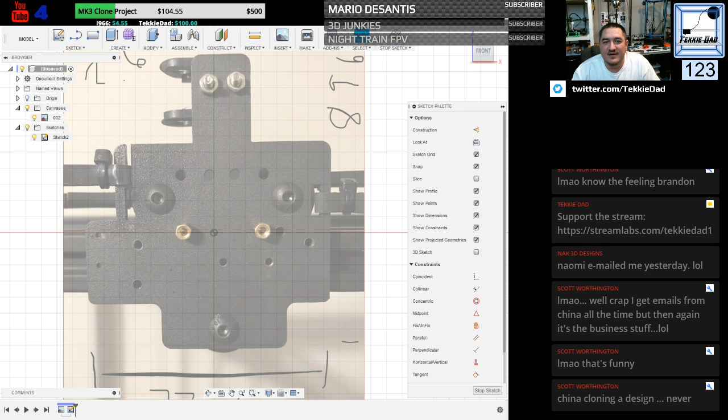Alright, so let's save this as the 2E. 2E Cyclops, that way it'll be already good. Alright.

Nice, yeah, keep it US bound. No, I'm just kidding, but hey, that's a company decision. Then you know, you're the author, you're the designer, I stand by you. It'd be kind of nice to have, and not in a mean way, but it would be nice to have some more US made products like this that can offer support, or parts that you can actually replace by going to a local hardware store instead of having to order everything from overseas because there's no real place to get millimeter anything around here. Yeah, true.

Yeah, and Naomi would definitely be able to help keep them on track with it since, yeah, it didn't work too well back in the day. But let's see, I need to edit the canvas.

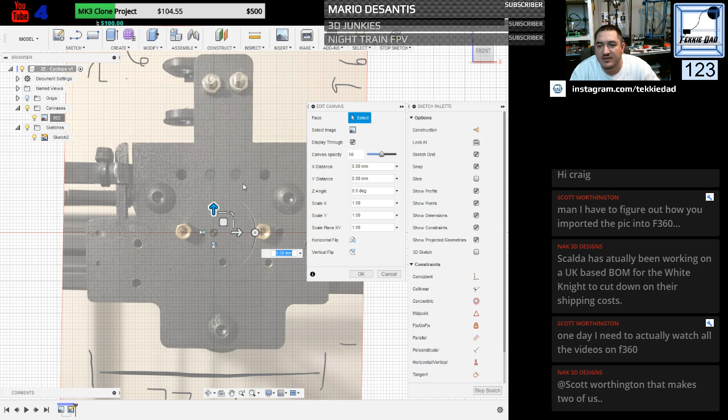But I had the degree off, so it rotated just a little bit. Still good now. And then once you do that, right click again, say calibrate, and as you see, I already took a measurement with my calipers, so I just marked it from the very edge over here and took the very edge. It's hard to see, but they're on the 2020 rail, the 2020 slot, right at that junction 90-degree angle corner. I picked that, same on the other side, and then I gave it the 77.2.

That way it would scale it the right way that I need it, so now I can draw directly over top, and I can draw the mount based off of what I see and what I need. Because I went with the Petsfang Cyclops, but unfortunately, and I didn't know this ahead of time, this edge does not line up over here.

I mean, you can hook it, but then the center is more over the brass nut on this side, so it's not centered over the wheel. And then none of these other holes line up with that mount either, like the mounting hole over here, none of that lines up.

These don't line up, and it's a mess. But it does have a really big cavity between the metal heat sink and the very back wall. It's got a nice deep hole for the heat sink, with a vent hole on the side so it's not directing airflow down, and the bottom is fairly sealed up. There's very, very little gap to make sure airflow isn't going down into the print, which is also really nice.

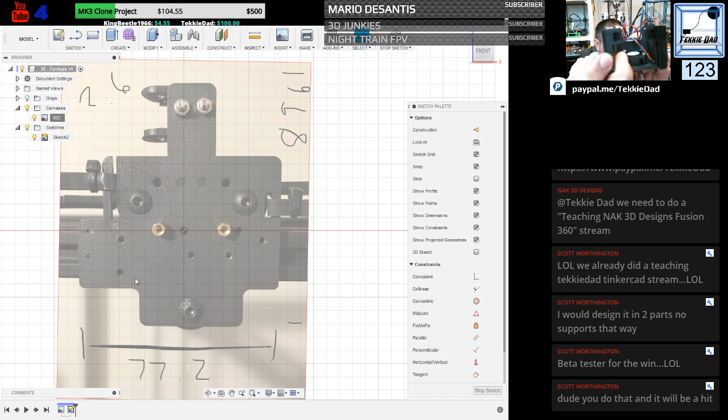But I am still developing the secondary fan add-on that I was making before with the tri nozzle - I was almost going quad - so you still have that as an option for this factory mount. So even if you don't have this mixing nozzle, or if you do, there'll still be a different fan replacement to go from just... sorry, I have one of the fans off... to go from the single that has just the 2-port on either side to having essentially a big bracket like that.

I just got to make room for the new hot end, and I've got it here on my desk. So there's... ooh, there we go. So there's the new mixing portion, nice big block. So when you attach it, I mean, single side mount heater cartridge goes all the way through, and very nice split. So yeah, I'm hoping this thing will be

Very nice. Right you are, Bryan Vines. This is the X carriage on the X5ST-2E, or E2, depending on which way you look at it. Their website still says 2E, but I think it's supposed to be E2. But I don't know, it's all confusing. Anyway.

So I need to take this part out. Where's my screwdriver? There's my calipers. Where did I put my screwdriver? It's the thing, I'm always losing my tools. There it is, okay.

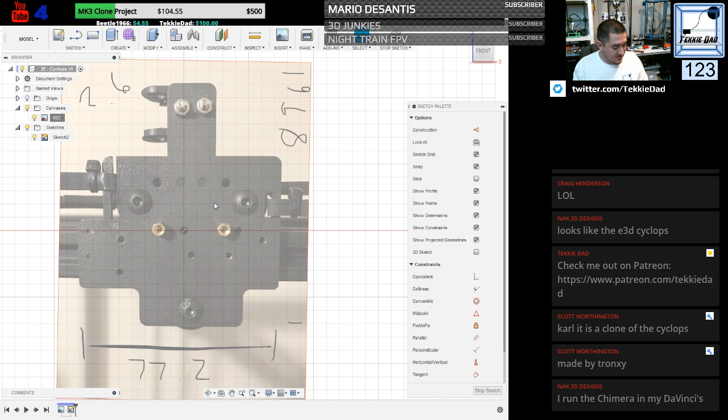So alright, so this is the actual heat break that they did. I mean, there's the pass-through to line up, but all said and done, when it's together, that's all it really is right here. This is the one that they shipped with my upgrade kit.

So as you can see, big issues straight out the gate. I got a nice silicone sock, but the height is going to be killer right there. Thankfully it's pass-through, so even though it'll sit low enough to print, it'll be buried inside of the factory housing, so I may not be able to do it so much.

Hold on just a second. Okay.

Alright, so let's get some measurements, because I need to make sure I design up a block here. Alright, 24.7, 24.9, okay. Center rectangle. So 24.9, 24.7. All right, so there's my extruder block.

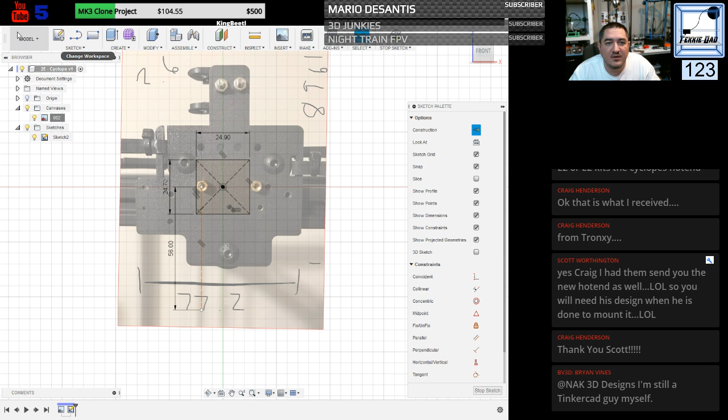I don't need a new design, but I do want to. Okay, so that's that cooler I was talking about. Go ahead and open that real quick.

This design was not able to be done on Tinkercad, or the original was. However, my secondary vent that goes through the back, all the way over through this open hole in the back - it's hard to see, but there's an air cavity going from one side to the other, and these double tubes come out through here so I can have a front blow. I can't do that in Tinkercad, but here it was pretty quick.

So this whole design can have a center blow, and I just need to get the blower piece itself. There's an inlet here, a double pipe, and then one that comes on the back side to go over here.

All of this, and the only reason I'm playing with it now is because Fusion - I've watched many tutorials, and since they're giving this huge program for free for us designers, since we make so little, I figured I might as well start doing it. That was my first major design. Everything else has been little trinkets and stuff.

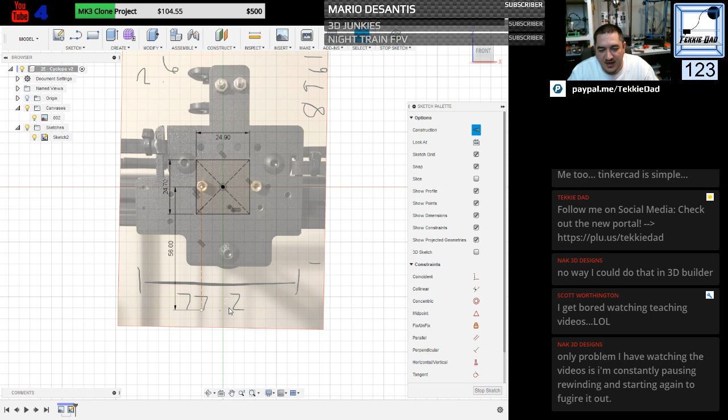So my heater block, the new one, is a grand total height of 54.2. So I need another line. 54.2.

So this, where is it? Ah, it's not what I wanted. But I need parallel to this point. No, yeah, it's not doing it. Fine, draw that out. Okay, why won't you move?

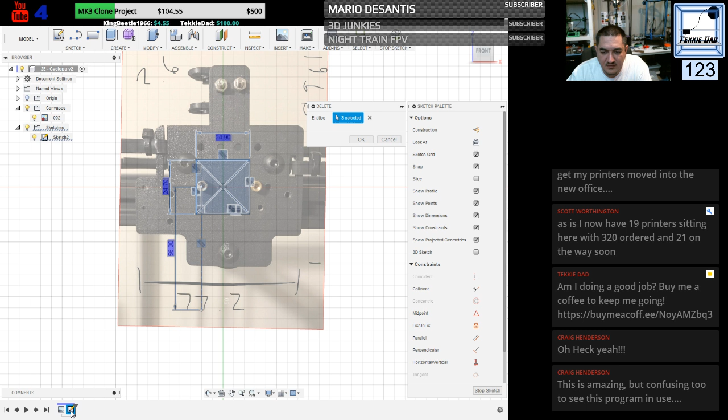So we'll do 60 there. Line, here, to the top. How big again? 54.2. There we go. Alright. I don't need a circle. Where is the 2-point rectangle? There we go.

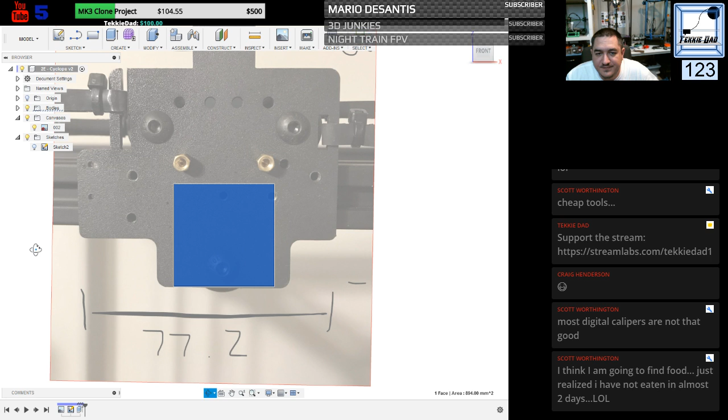So the thickness of the entire plate is 2.6. So distance back is 2.6.

Yeah, go find some food there, buddy.

Alright, so how far out is that? The head of that screw pointing out, 3 mil.

Fine, okay. Alright, so these... alright, so I need at least, let's see, it's a rectangle. Two-point rectangle. So yes, on the same. Right, so I want to go.

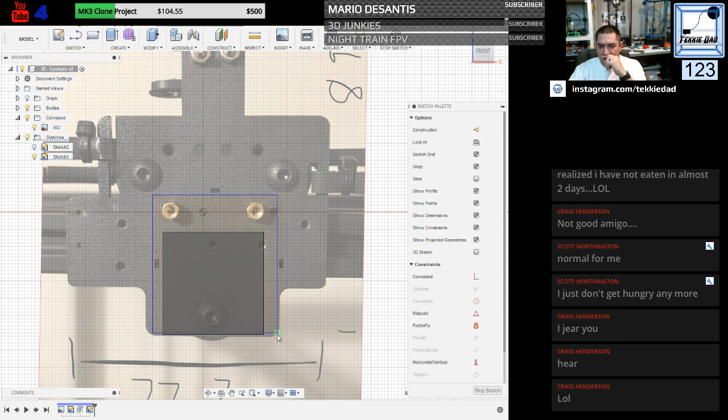There we go. Alright, so that'll be kind of the framework. It looks like that. Well, I don't know. Let's bring that in just a bit. Or no, let's bring it out. Yeah, let's go to the edges there. Come on, line up. There we go. Alright. Do a circle.

This is an extrude of... let's do, how big was the cavity here? Well, I guess I should measure from in here. I have a total of

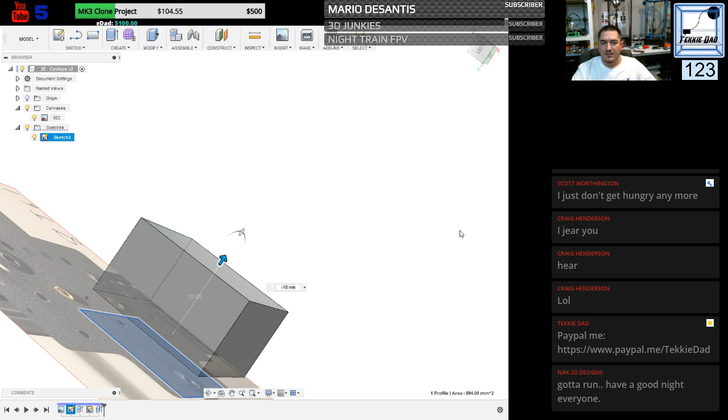We will do, yes. Start from the offset. Yeah, there we go. Well, except for, no, I want to be a cut. No.

There we go. Now it's a hollow. So yeah, just in case you weren't quite catching that, because I did it out of order, I moved it here on the timeline there at the bottom to make the big body extrude first and then go back to the little body for the cutout.

So that would be right. Okay. Alright, so that should cover that piece. We're going to need to go back to this sketch.

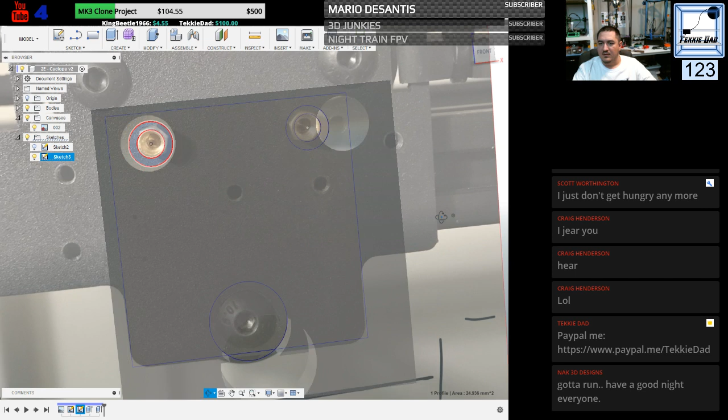I need to do our center circle, but only bring it out to 4.5. Sketch 1. So we will go. Trying to think here. All right, night, Carl. All right.

So it needs to be offset -5. It's going to go one direction, but I'm going to go maybe 5 millimeters. See how deep. I made that 12. We'll do 12.

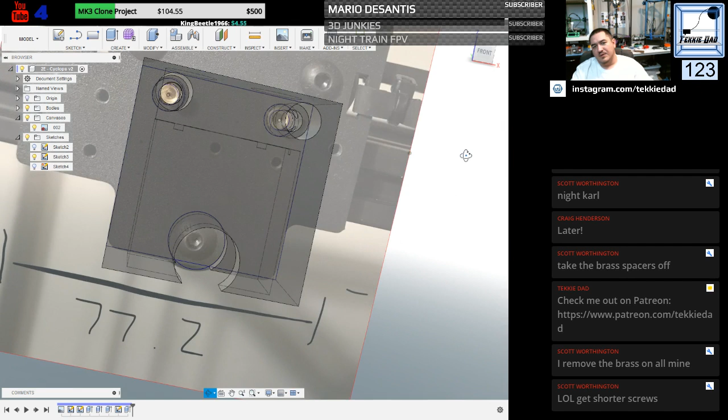So that's what I need to go. All right. Yeah, that's going to be interesting. I don't know how well that's going to work. Turn off the canvas for a minute.

Yeah, I don't see that working too well. Because even though you can put the screw all the way through, that back piece right here is where the screw head would be, and it's going to hit these PTFE cutouts. Like, the head of the screw is going to be too far in, and you won't be able to put that through.

The idea, I guess, here's where the heat sink itself would go. Though I don't know why it made that a hole there. Oh, because I didn't close it off there. Essentially, I guess what I was kind of thinking.

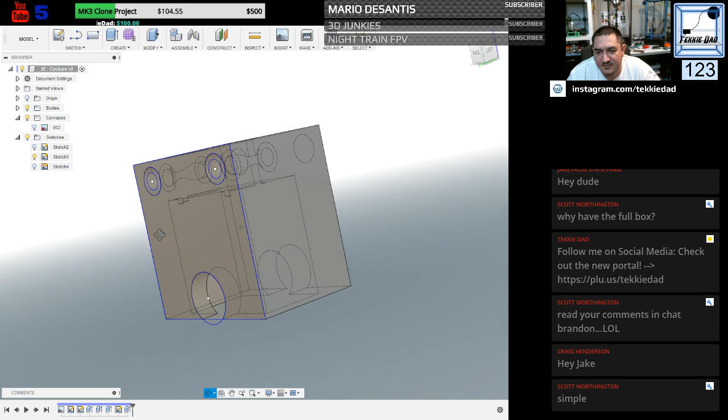Probably would be better to just account for taking that out, you know? I was mainly just looking like they unbolt this, and it has the brass inserts that they don't have to thread those out. They can just literally take the adapter block, slide it right on, put your 2 screws, and then because the hot end, the new one has the 3, which really you only use the front 2. Like this one even, when you line the block up and push it through, it's held vertically. So it's got a hole here to let the air through.

So that's what I was kind of thinking, but like I said, I was wanting to try to make it fit in the factory metal housing. So you want just unbolt that, unbolt the 2, and then you pop that new thing on. I agree, we're just gonna have to tell them to take that front brass piece off.

All right, so where is the sketch mark? Yeah, should be. Oh, that's for that one. That's for the vertical. There we go.

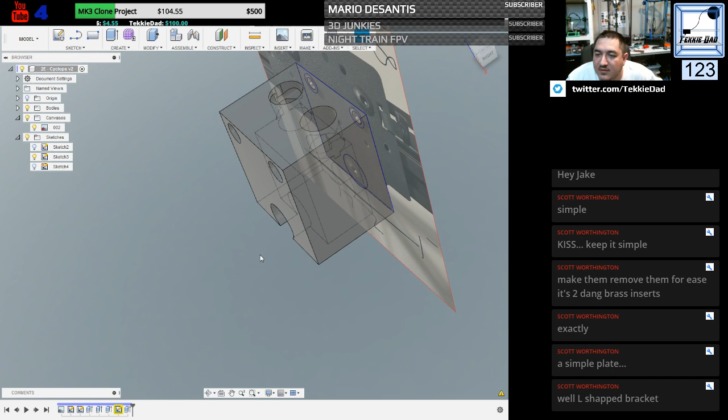Oh, what's wrong with this sketch? Review the warning. Edge is missing. You need an edge is missing. Well, why are you missing the edge?

I don't get what you're missing. Construction line. Fine, okay. I guess I drew a line somehow and didn't mean to. For ease, raise it up a bit to drop the mounting bolts below the top of the cold end.

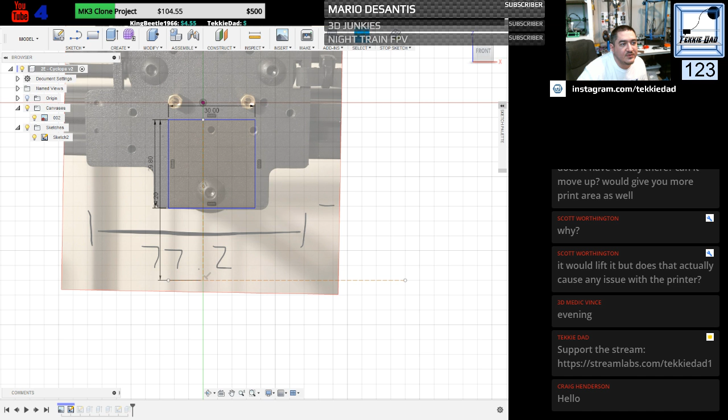Alright, let's try that again. Alright, hold on. I was trying to get my camera for the Tronxy to start coming up so that I can, yeah, okay. Come on, refresh. Sometimes that's the only thing I hate about Octoprint. Sometimes it just gets on this weird thing where it doesn't want to work. Like the web page control just doesn't want to pull up what you need it to. Come on.

Okay, there we go. That should work now. Why do you feel like this is... There we go. Okay. Come on, update the picture. Alright, there we go. So that's the actual mounting bracket.

So if I line this up with the heat block bottom edge, there's probably about maybe a millimeter to clear that wheel. If I go like here distance, so it's offset top edge of the brass area, that's what you're talking about?

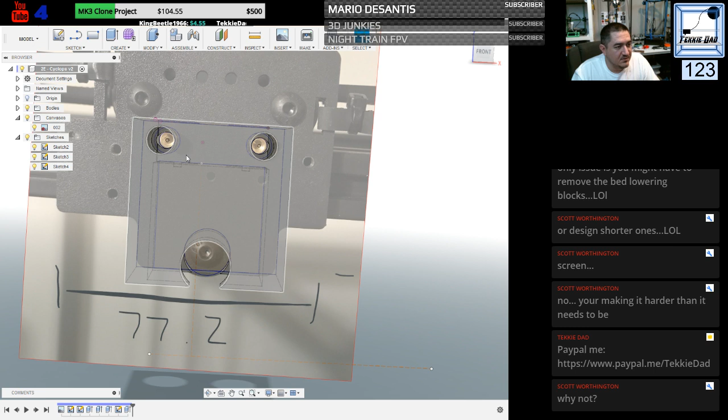I mean, as is, from the plane I'm using, the outer part of the box would basically air block the rest of the cavity that's left in the hot end, or the factory metal shroud. So all I was going to do is make an angle cut here and here to allow the fan to blow directly onto this cold break, and then put little vents on either side so that it blows sideways. Once it hits the cold break, it'll go out.

But that's like the whole cavity. So right now the bolts would go through, they'd meet up closer back here, but then you still have the hole here for the two fittings to go through.

Why cut the hole so big the bolt head fits through it all the way? I may have rotated before I understood your point there. Let me get this back up. Alright, so I put front-facing holes so you can line up your bolt to go all the way to the back wall. That way it grabs plastic inside here and pushes it against the back plate.

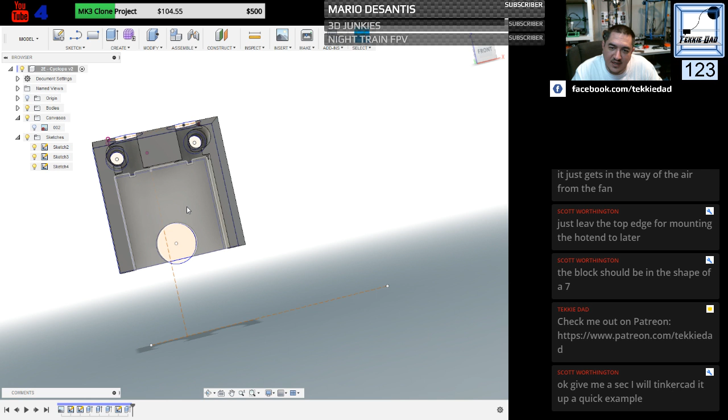I guess if you're wondering, that big hole, for anybody watching, the bottom one is supposed to clear the nut right above the wheel. It's kind of how low I was thinking that the hot end or the cold end piece needed to go, so I was trying to account for a cutout so it'll...

Oh hey Craig, you know what? I've been beta testing a lot of stuff, so I'm trying to learn. It just... I'd, if I have to be the one to go through all this craziness to help others out, to make it where they can get a drop-in part because there isn't a drop-in part that fits these Tronxys, that's fine. I'm good with it.

I'm thinking I may, on a side piece, eventually reuse this switching dual extruder head or dual color head. Now that I know the measurements that I need, I don't know, maybe put it on the deltas, or maybe put this on the kids' printer. I don't know, but I'm definitely not gonna let it go to waste. Just don't know what I'm gonna do with it yet, because no matter what, I would have to buy another motor. So, you know.

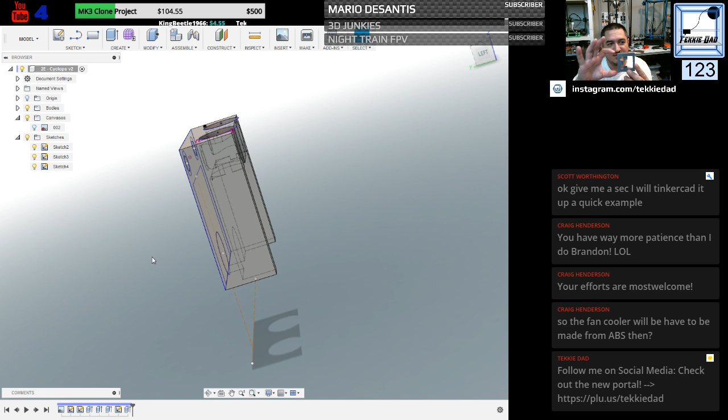So like none of my printers have anything ABS on them. It's either PETG or just PLA, and it's 90% PLA. There's only like, I think, a handful of PETG parts on anything. But yeah, I don't print ABS. Plus, I don't have any ABS, so.

The only ABS I've ever printed was with the Maker Farm that I've already sold. It was the two rolls of ABS that the previous person gave me when he sold me the printer. That's the only ABS I've ever used. I haven't even used the three little 30-millimeter bits of ABS that was supposed to be for my printer from that Wish debacle way back when.

You almost done, Scott? Jeez. I'm just kidding. Alright.

I guess while we're waiting, this is kind of the design. I was trying to make it so there's no supports, no issues, you just print in place and you're good. I'm sorry I keep moving it, trying to get a good angle so I can explain. There we go, hopefully you can see that. Let me zoom in. Okay, so here you would have... some of the features you're trying... oh okay, whatever.

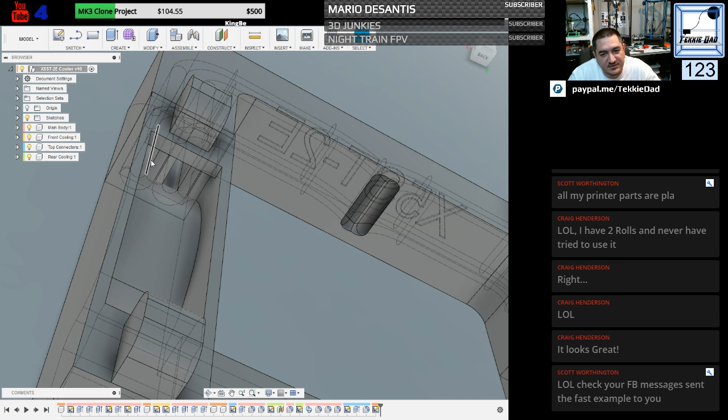So what I was trying to do is make it where this curved surface connects to the little miniature radial fans that are factory, and it'll blow 50/50, right? Then you have two chambers, or two air paths, one on the inner track and one on the outer track, because that way you could print it without supports or big bridging. It'll make the curve come around here, and both will come curved out here to this opening that I've got to design a vertical triangle thing that'll cone it downward, so it goes from top and works its way down to an opening at the bottom edge.

On this hollow chamber that goes all the way through, what I was going to do is make some relief cuts, or inject a curved triangle that splits this in half, and then you'll have a couple of air vent holes, maybe two, so the air will go into this chamber, make the turn, and naturally curve out on both sides, so this hole will have something to avoid big bridging, just in case your machine can't do bridging very well. And then some type of air pocket on this area on both sides will also go, so basically you get four directions of air hitting your part, so no matter what part it's at, it's still getting some air.

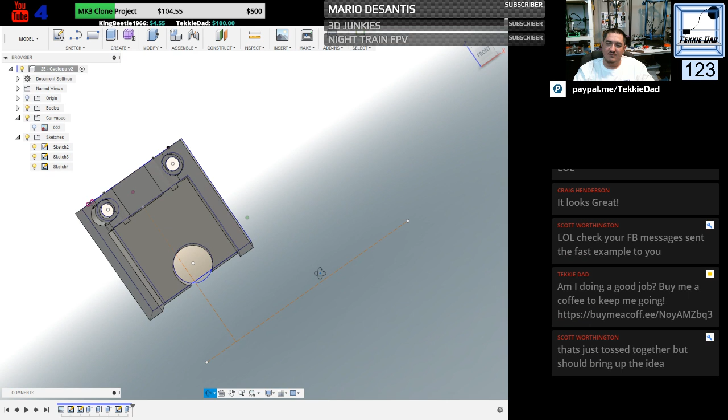Okay. Oh, I see, I see. You're saying raise it up higher than... okay, gotcha. Now I'm tracking like a missile. Okay.

You're right, you're right, I overthink it. Okay, so based off of that, let's get the whole mess over again. So if I drop that, so do that, then the... okay. Got good wiggle room, alright. Okay, so we need to, no.

So this sketch 2 is actually the cold block. This is for the housing, right? We'll do a shell. Alright, and this is for... there we go. Alright, so we need a shell, edit the sketch. Okay.

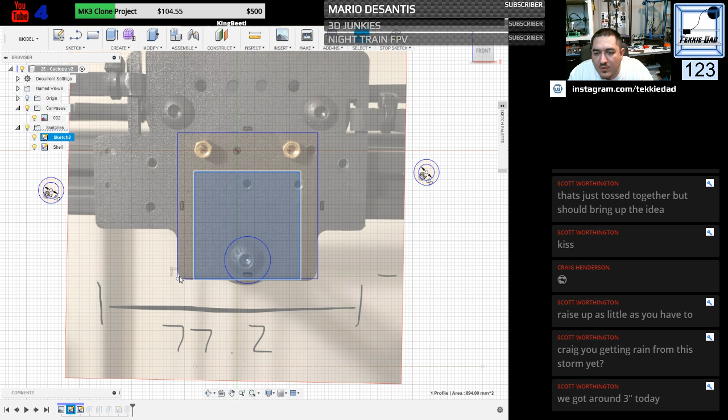So this is just for now. Okay, and then sketch 2.

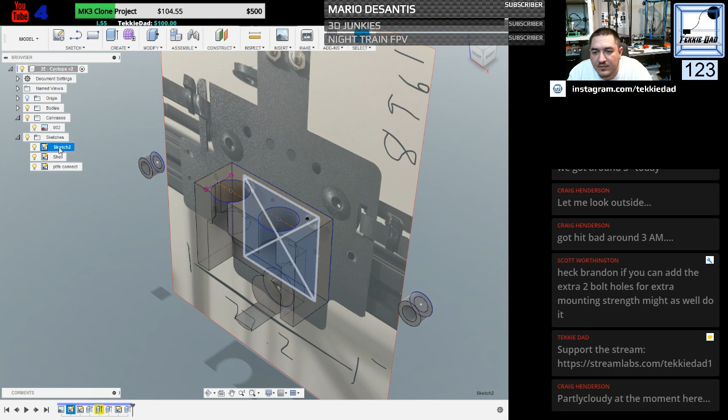Yeah, I know, alright, so that's gonna be... ooh, what did it do? There we go. Okay. What? Oh.

If you can add the two extra bolt holes for extra mounting strength, might as well do it. Oh, you mean these others that are down here? Or at least maybe just the centered one? Okay, yeah. Do center. I don't need a second one. Yeah, just the one.

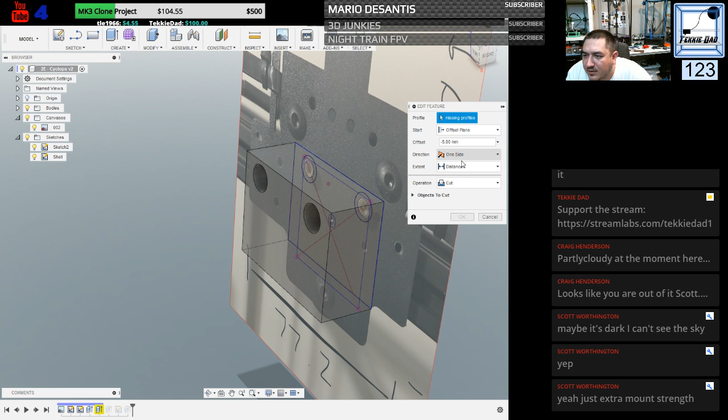Alright, so that should cover both of those. It means this whole area we can get rid of if we're not going to drop below it anyway. Alright, so we put the bolt holes through. Missing a profile, yeah okay. Delete that.

Well, I'm not using it anymore anyway. So, this is the only thing I really don't like. Sometimes this stuff just... Oh, I don't want to delete it. Delete that projection. There we go. All right.

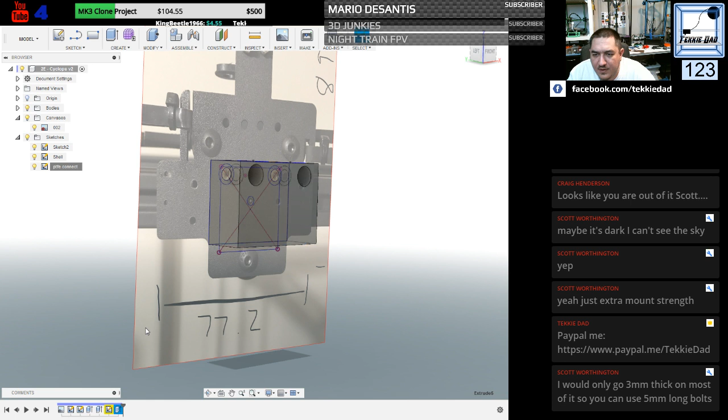Extrude. So that cuts out for the whole thing. Okay. Offset, 3 mil. Negative 3. All right, so now we have a back wall, no more than 3 mil thick.

Put the bolt on. Okay, there we go. So you put the bolt through, that attaches. Then we need to figure out - plus, if the top is too thick, then when you have to replace the connectors. Yeah.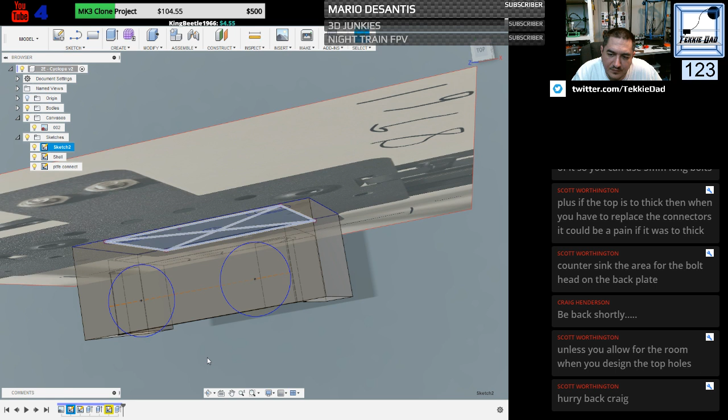Okay, so bolt in. Alright, those bolt in. And then there we go. Alright, so I need...

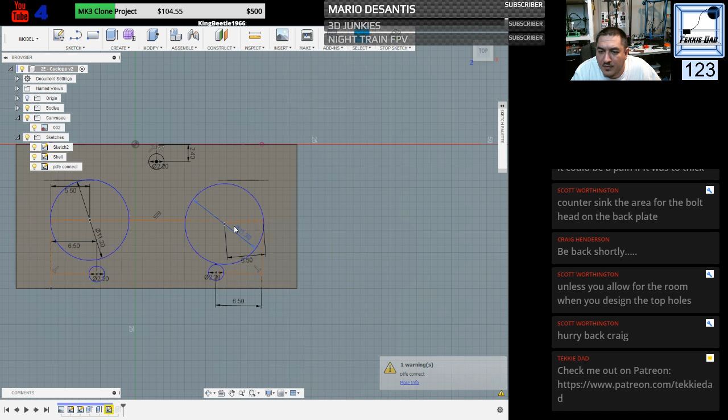What I do. What? Oh, damn it. Okay. Damn it, why did this...

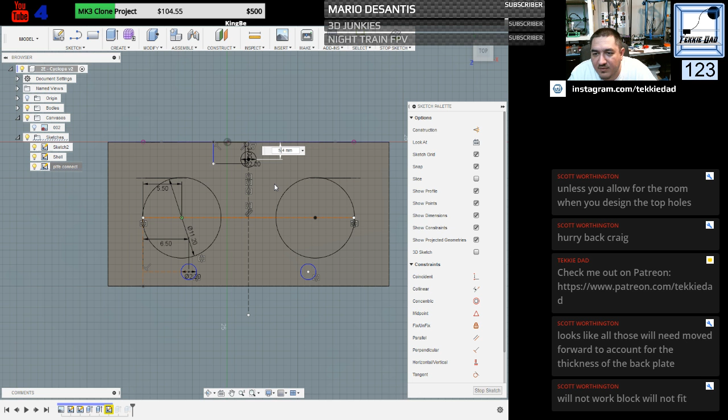So I needed to go from here to 3 mil. And this is yeah, 2.4, but I need it. It would be 5.4. There we go. All right.

Get rid of that line. There we go. That's what I meant to do. Alright, so that's the 3 holes, the 2 PTFE. That will not work, block will not fit.

Why won't the block fit? It fits in this big cavity right here. Oh, okay. All right.

Okay, so that is the top of the block. We should go maybe like that.

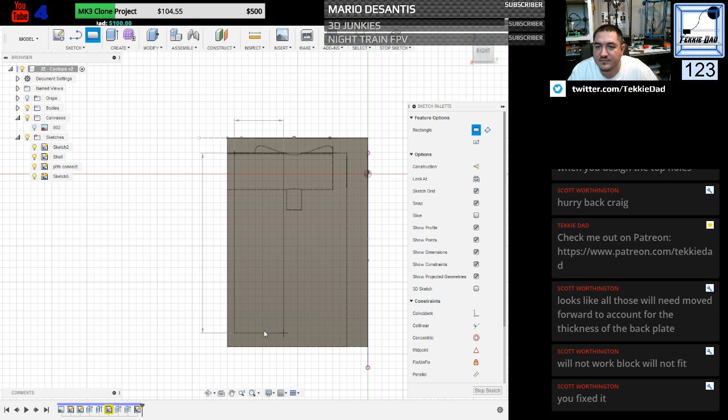Okay, so 25 by 7. What was it that I did before? Oh, no. Sketch. That's what it was. Alright, so there we go.

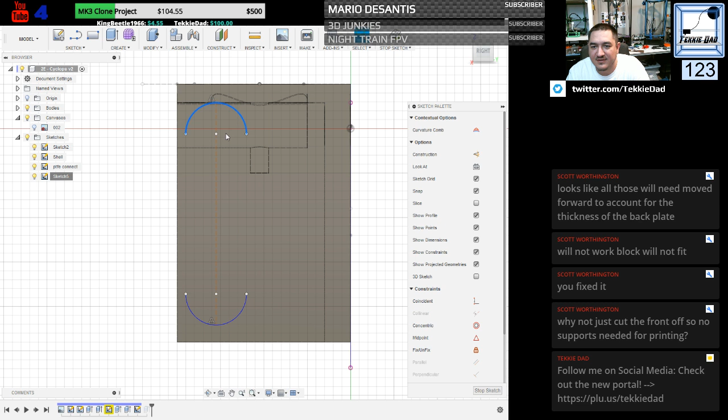No point in doing all that craziness. Alright, we'll just delete out the oval. Delete the line. There we go. We'll just draw a line. Alright, so from here up here.

Alright, so that should give the vent piece in the front the whole cutout so the airflow, it doesn't do anything. Or are you talking about just taking this line and diagonal cutting all the way to the bottom here? Minus the wall thickness? Yeah, I guess there wouldn't be a point to use any of the material much lower than the hole here.

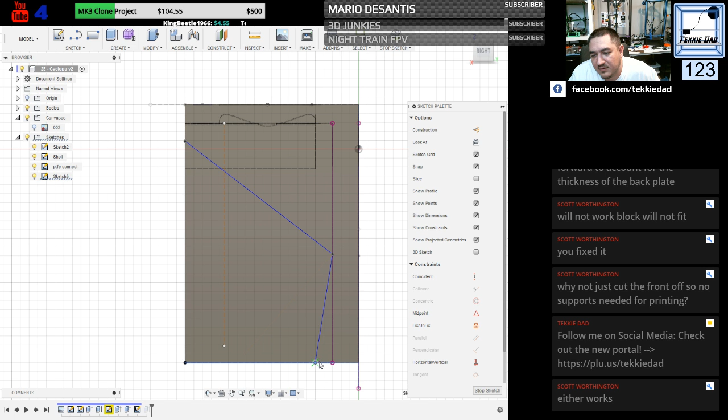I just kind of do that. Take out there. Do that.

Alright, well, we'll call that good enough. Let's go ahead and just throw it out to the printer. We can do our checks and balances from there. Alright. Yeah, I want the whole thing. Okay, let's save this thing.

Custom. I need a new folder. Alright. Come on, 3D printer. Do. Print.

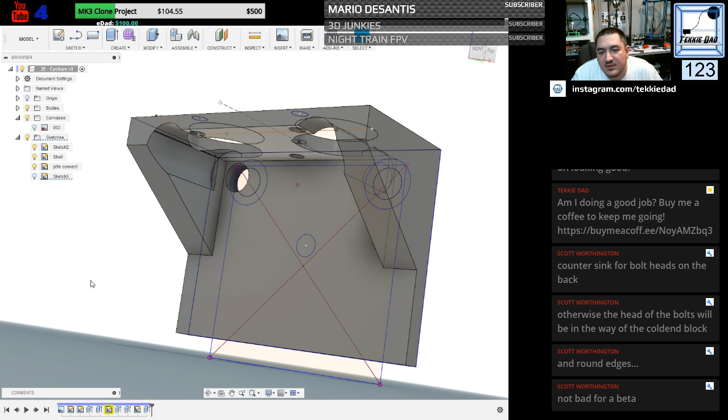Oh, sorry, countersink for the bolt heads on the back. Oh, the leading edge over here? Yeah, probably not a bad idea.

Let's do 1 mil. What's 2 mil look like? Yeah, one's probably gonna be. Saying like that, just round them out. You think that's enough, or?

I think having that rounded profile like that's enough, or should I do like... Are you talking about like an actual diagonal cut, not a rounded one? A chamfer. God, I can't even think of the name.

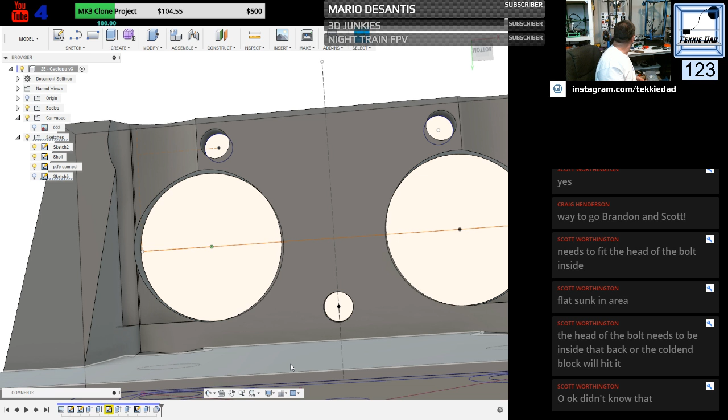Alright, come on. Finish heating. Almost there. 62 out of 65. 63 out of 65.

Well, it says this is only going to cost me about 5.41 grams of plastic to do. So I would have put it flat against the back wall. Oh yeah, well, you know, I was throwing together some of the orientation from when we were already making it shorter, so I didn't quite get that right.

I really need to get that out of my start code. No, not the console, you goober. There we go. We'll let the new Delta print stuff.

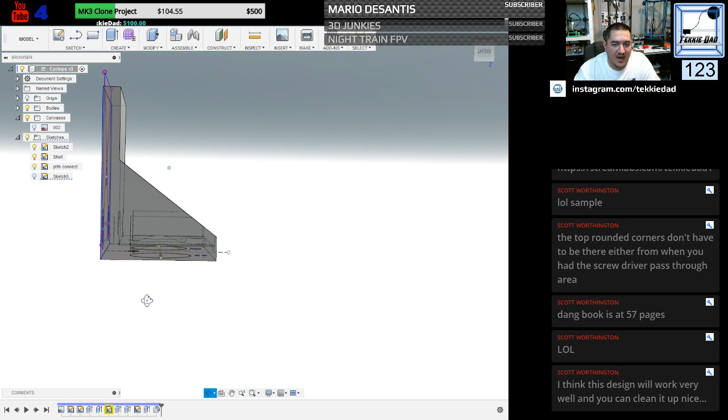Printing it like this, so that the PTFE, the biggest holes, are facing down, but have like a U shape, a lot like this one, so that once you place it in there, it's preventing any of the fan air from going down towards the print at all. By having it almost sealed, it's still got a little bit of wiggle room, but you cut out any of that extra weird airflow. But then making it kind of like this where it has exit vents, so that as the air blows in, it still has somewhere to kind of deflect and go out, so you're not creating a weird vacuum thing.

But I guess the more simplistic I make this, the more universal it'll become, and then you can kind of do your own thing. That way you've got the nice factory stuff, you know?

Alright, so that's chugging away on my newer rainbow filament. Because I didn't have anything else loaded, so we'll just go with that.

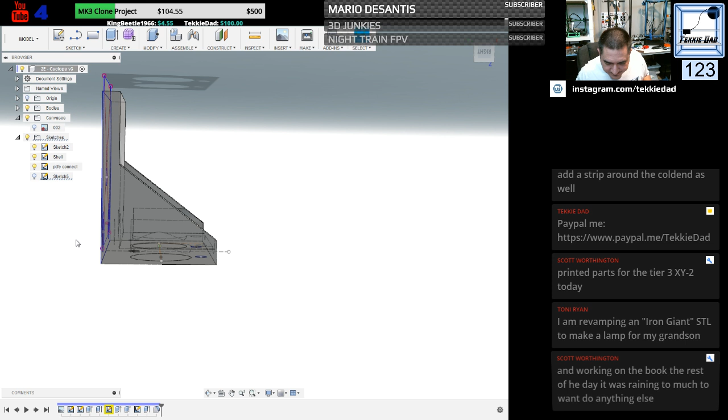I guess set the... I've got too small of a desk, for real. Like, I set one thing down and I don't find it ever again. And that's how that... You take it over there. If it was a snake.

Oh, hey, Carl. It's another Carl. Get you guys at least back to something that's moving.

Where did... How did I lose that? There's the colon, there's the... this. Oh, it's right in front of me on my keyboard.

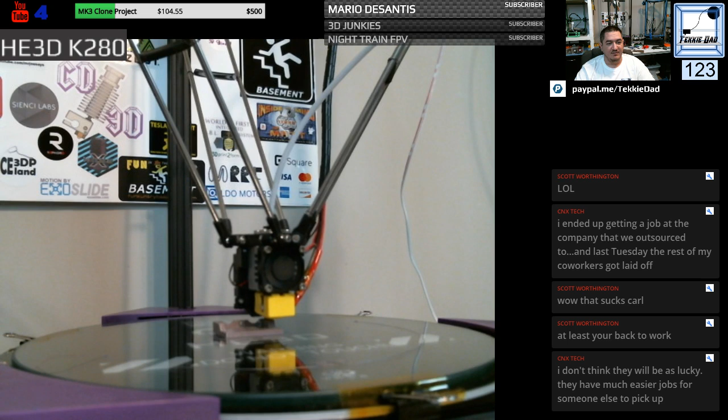It is an unfortunate side effect, all these companies trying to save a buck by outsourcing, and just, yeah.

Oh well, apparently there's an update for Fusion. So let me go ahead and save what I got, and I'll restart Fusion, and then yeah, we should be good on that.

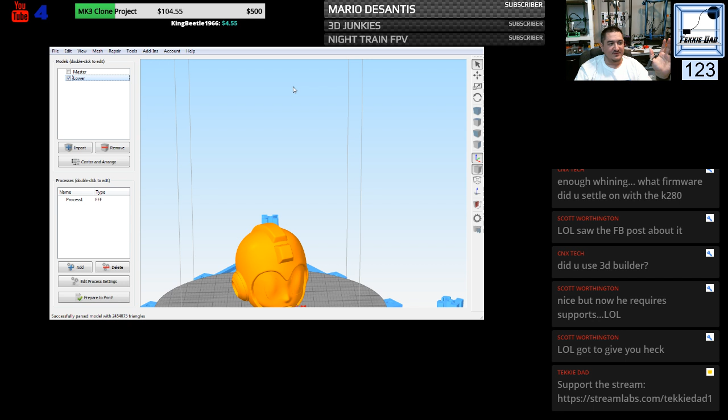Alright, well there's his full head, which, just so we put it in perspective: this model has a black insert eyes, white outsert, the face, so that's 3, the helmet itself 4, this piece 5, this piece 6, the ear 7, the other ear 8, the insert in the ear 9, insert in the other ear 10. So this one head is 10 pieces that I had to line up and do all this craziness with to get it to kind of work. It's still not perfect, but since it's been quite a while and he hasn't gone back to edit the file yet.

But yeah, I can put the link to the file. Oh, this is just the red parts. Crap, that's not what I wanted. So that's the orientation of the 2 ears and then the blaster. Oh, it didn't save my changes that I did.

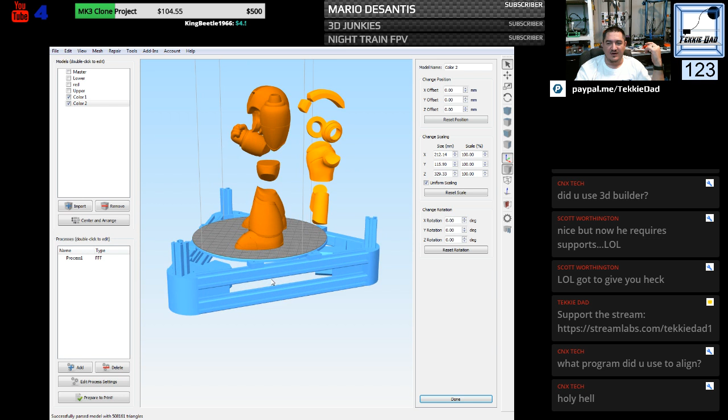I just use Simplify 3D, to be honest. It was a very long process. But see, I can't get these to offset for some reason. But this is all of color 2. See, I don't know why it's the right height on here, but it's not. Come on. Dual extrusion.

Yeah, we'll do that. See if that works. Come on, change it over. There. So then, yes, right now this would be huge, but this is what I was working on, trying to get it so you could do the dual color profile, and you've already got the head, or part color 1 and color 2 based off the diagram he made, but they're already in the right position, lined up.

Then it was to try to get the face all lined up in there, but since that has 3 colors by itself, it was like, oh, okay, well what do I do? So then I was trying to export it where, it's not going to show it right here, but to cut it off at the shirt, or the waistband, so that the legs and all of this, you could put the waistband on the foot of the build plate, and that way it would practically print with no support because it's going upside down.

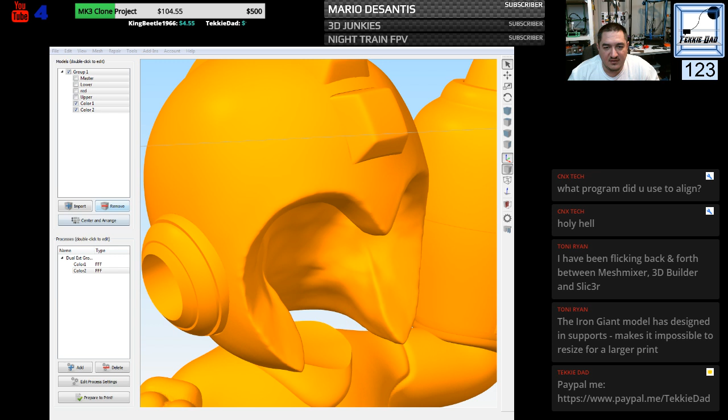Let me drop just the face in. Come on, grab it. I don't know why my computer's acting like this tonight. Didn't do too bad on the bridging though.

Alright, that is taking way too long to import. Come on now. Sonic Customs, Figure. Come on. Yes, move out of the way. I don't know why it's doing this tonight.

Ever since Microsoft announced that they're not going to support Windows 7 very much longer, it's on the last year, it's like my computer's just gone to crap. Everything is starting to have issues.

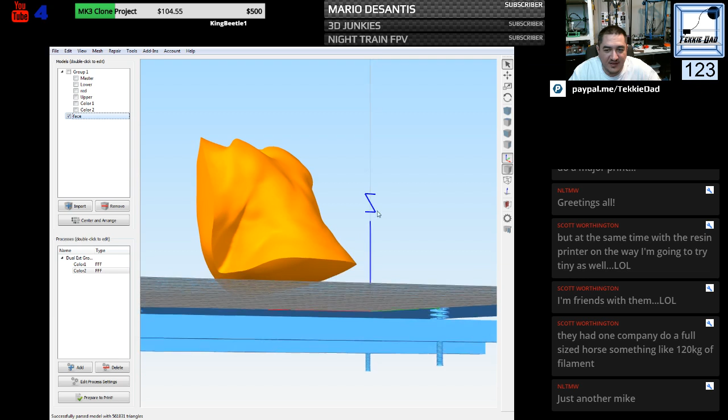There's the face. Golly, I don't know why it took so long just to select it. But as you see, let me uncheck. See what I mean? Like, you use ZBrush, and that's great, I don't knock them for that, but it's like the model could have possibly been a hard line angle.

You know, even in here, make it more low polygon cuts, and that way it locks into the helmet better. But the helmet should have hard cut lines as well, not like where it looks like you took a paintbrush and punched the edging.

But then it's got the big... it's hard to get the shading right.

Hopefully you can see it, but this is where the black insert for the eyeball will go all the way through to the back, but the white one only goes to here. At the same time, why didn't you bring this wall forward so that when you print, you do flat on the back with the white and flat with the black, so those two edges line up perfectly and you just set it in. Right now you'd put this edge of the black eye flat on the bed, but when you put the white one, you don't realize they're going to be offset.

I haven't put together the face yet because of that. It's a little weird.

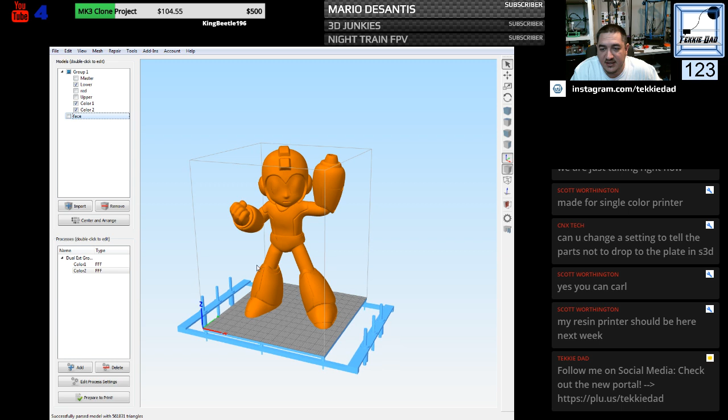Because of this joint alone, just between the blaster and the arm, I had to half embed the blaster into the arm just to get some of the back part here where the arm is going in.

It doesn't align properly. The two models are still a little bit off. If I go into the print preview, even when scrolling down the layers, there's a pocket here and one down here. No matter what I do, I can't get it to fill the void to make it all infill. It prints and cuts out this hole, then comes back together in two spots.

The only other thing I thought of was, since I'm assembling this, make an oval or a circle, whatever, and just drop it right in that area, and then export it back out.

Mesh Mixer, make solid? Okay. I don't know enough about Mesh Mixer either, and I tried to reach out to the community to find out if there's a better program to use, because it was taking me forever to align all this stuff, and I don't know of another program.

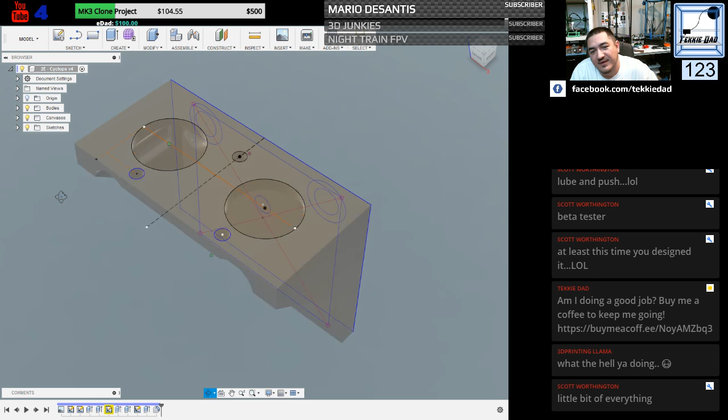Wow, I guess now I'm seeing it. Alright. Yeah, okay, so essentially, PTFE sketch - the tops of all three of these circles are actually aligned. Well, this one is just a hair below these. Okay, so if I drop that...

But then I have to extend. Okay, so we'll stop that sketch for the moment. We will go back to shell. Okay, there we go.

How big is this screw? 10 mil. I need a 5 mil. I don't know if I have any. Alright, well, I'll have to look at that in a minute.

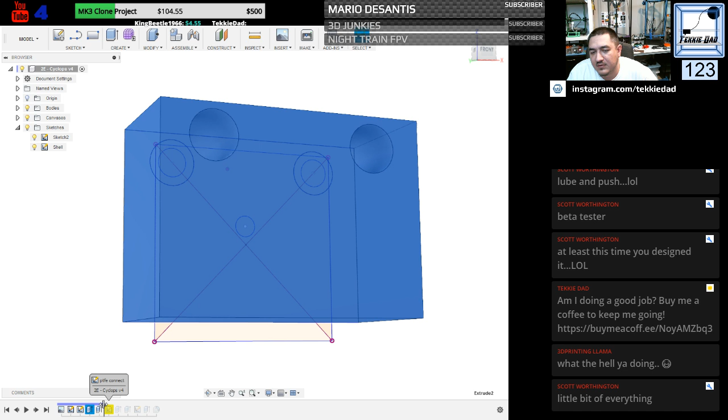Shell. So that should help that alignment. Okay, stop that. Okay, so we did that, and we added that back in.

And we did that shell, but something is wrong. What is wrong? The vertice is missing. What vertice are you missing? I don't understand. Relink. Relink.

I guess this was what it was talking about. I don't know. I think I did it the other way around though. So when looking at the cold block, distance from here to here.

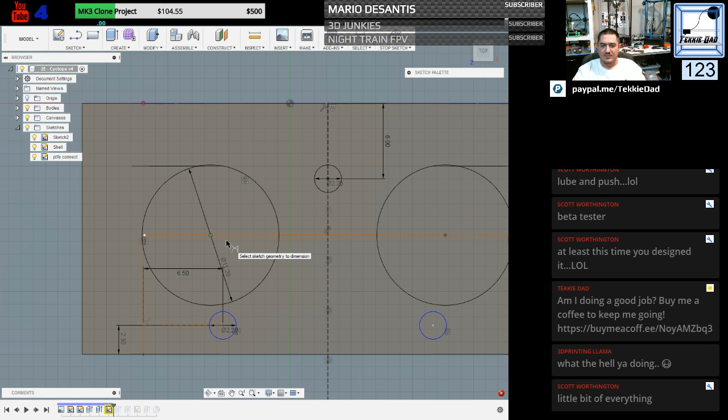So I guess what happens if I just delete the circle out? There we go. Alright, so center point should be... see, that doesn't make any damn sense. Why are you being so hard? Someone help.

So the widest point of this PTFE coupler is 11.3 millimeters. So this will do 11.35, just a hair bigger. But it shows that from the outer edge to the center on the back is about 5.3 millimeters in, which is why, I mean, okay, so don't need that. So 5.3.

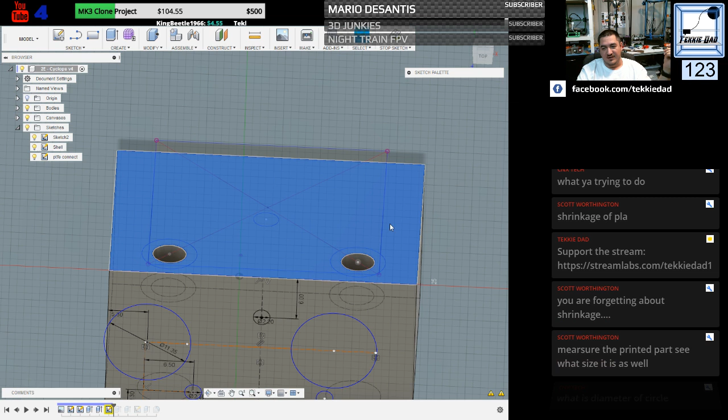Hold on, I think I just figured out what I'm doing wrong. Oh, crapiola, okay, I see what I'm doing wrong. I'm measuring from the outside of the whole thing, not outside of the cutout block that we're doing. Oh man, okay, well that makes more sense now.

Alright, so how do I get that line to show up right? I think that's the edge right there. Okay, so this should be the end, or the height of the block. It's 5 millimeters in.

So that should actually, if I'm okay, 10.3, that should be okay, so that would line it up more with this line, but see, it's still cutting over wrong. You can project that line into your sketch. The cutout block is too small? What do you mean the cutout block is too small? Let me stop my sketch so I can get back to the part.

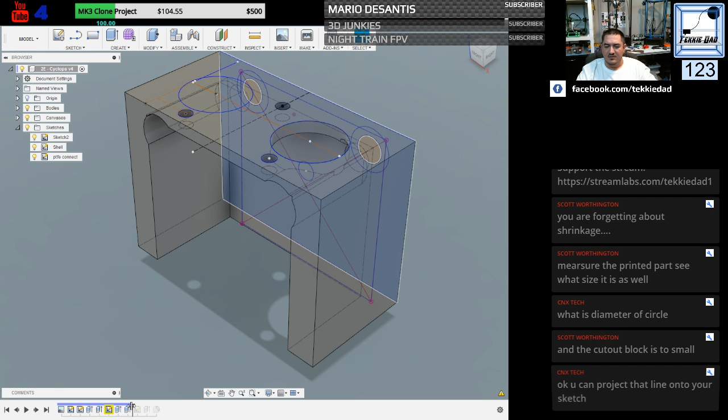What are we saying is too small? I'm sorry. Right, I already increased the dimensions of the square. Ugh, not extrude. So this is the small, or this is for the cooling block itself. Literally, it measures at 30 on the X, which I've got it at 30.2 now.

And 29.8 tall, which I've rounded up to 30. So I've given it an extra 0.2 for it. Well, because the print itself, when I did it right on 30, well, no, I guess I didn't account for that much shrinkage.

Yeah, it's got an inside diameter now. Let me get to the right section here. It says 29. 29.2, man, it's losing 0.8 millimeters of shrinkage. That is ridiculous.

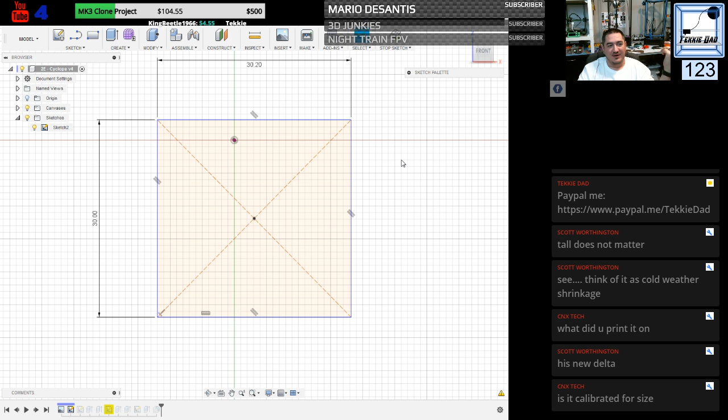Yeah, I know, tall doesn't really matter. So it would need 0.8. So it did one extra perimeter in on either side than what it should have done. The K280. Should be. I guess that could also be part of my problem, is that it's not really. I mean, I've run all the auto calibrations. I mean, could have another issue.

Alright, so the outer shell, let me. So I added just a hair. It says it's supposed to be 30.2 now, though I think I added 0.2 on it to make it 5 even, so it would have been 30 overall, and overall 30 is exact. So the outer dimensional print is good, I guess it's just the inner dimension print is not quite.

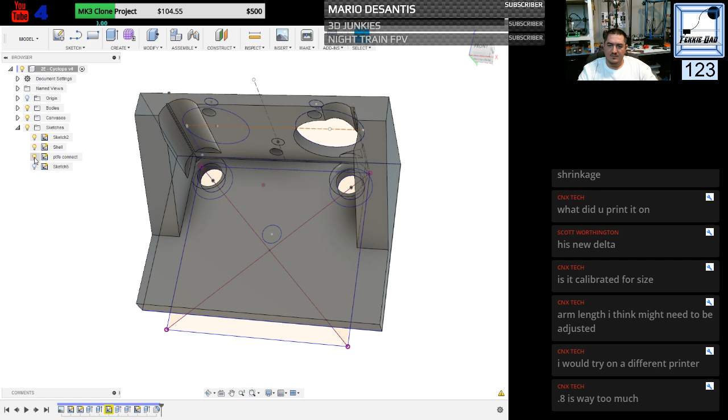I don't understand what it's... Which sketch? I've got like 4 sketches now. I mean, depending on where you're at in the timeline, you know what I mean?

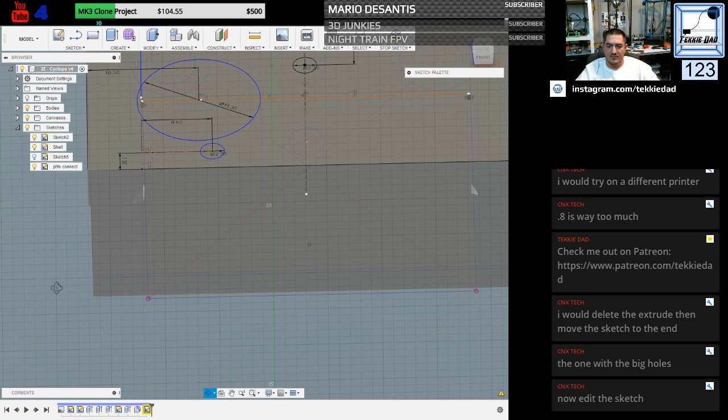Okay, how do I project it though? I've never done that. Yeah, right here?

So what, I project this whole bottom? Is that what you're talking about? Like, what do I select for the project? Because the whole thing is body, so it'd have to be a specified entity.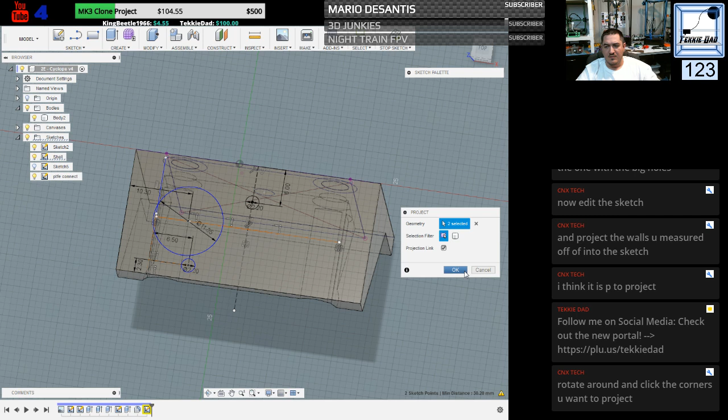Okay, so I'm getting the line. Is that what we're talking about? So that it makes sure that I'm lining that part up.

So that's what I don't get still.

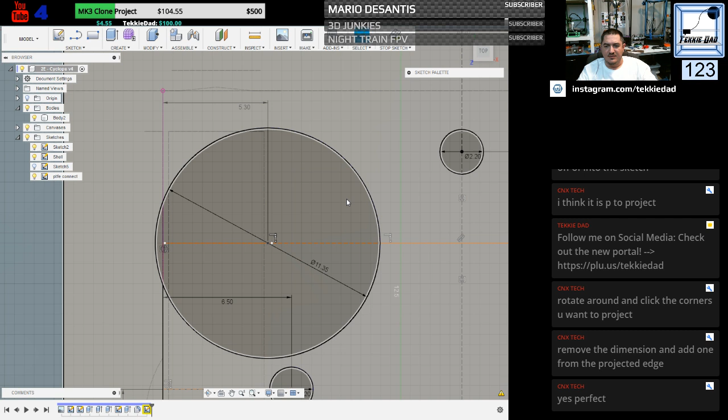But I guess my problem is, okay, if this pink line is the projected edge, which should be the outer edge of the block, if I take that edge and measure to say like the center of these grub screws because they're smaller, which is in center of the large PTFE hole everything, that comes out to... hold on, maybe that's why I'm off, it's not lining up right anyway.

Okay, that's probably my issue right there. I don't know how I was getting 5.3.

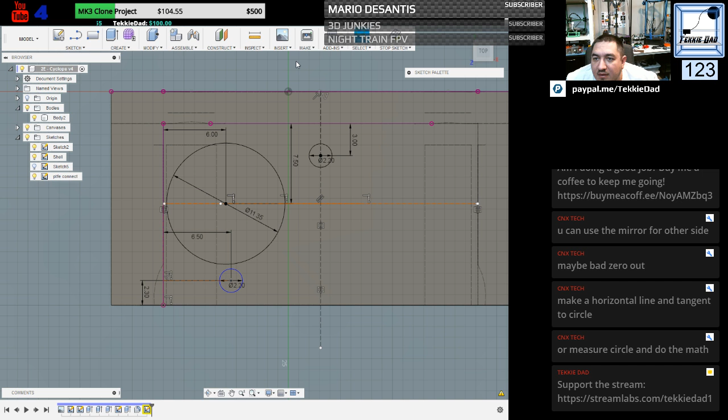Alright, so I need to... that and that. Okay. Project.

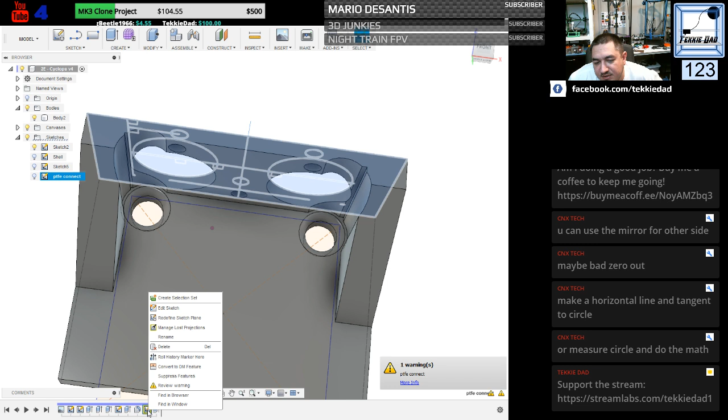Alright, well. Why does that still say that there's an issue? There's a lost projection point? But where?

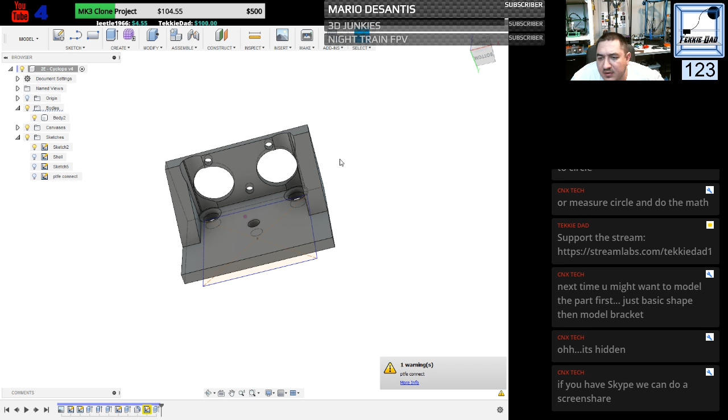Well, it got little to no, almost no drooping under the big holes. So, it's a hidden reference point.

Well, that point right there, I don't even know what that goes to. Oh, it's an origin point. Okay.

All right. Guess we can see how that one works. Oh, man.

I am exhausted. All right. Well,